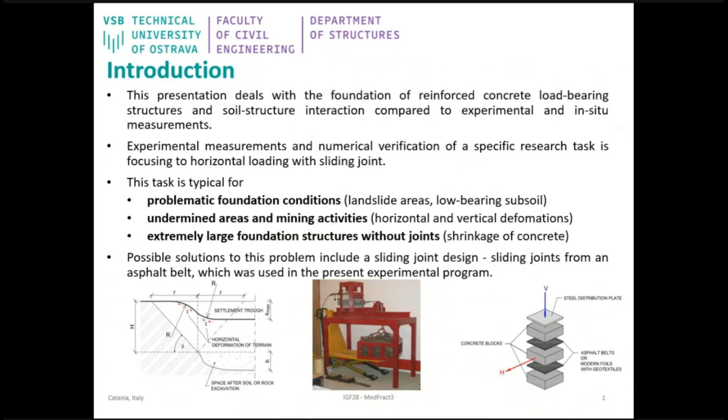We tried to verify this laboratory test on real structures. So in the interface, we have solved this soil structure interaction task. It is the method of calculating the settlements according to the Czech standard, which is the same as in Eurocode 2 or Eurocode 7. We have in Czech Republic these correction coefficients, which vary between 0.1 to 0.4. In Eurocode it is equal to 0.2. It is the same procedure.

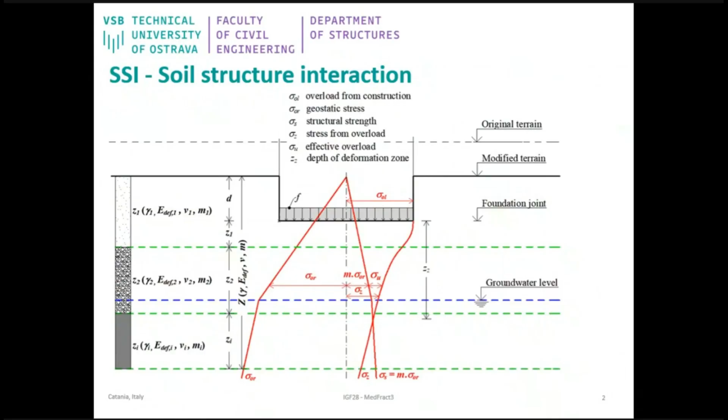Here is the experimental program with a small foundation plate. We verified 2 foundation concrete slabs. The dimensions are 2 by 2 meters, height of 0.15 meter, and the experiments differ in the load character, because it is the original subsoil from clay. We have this specialized facility, the so-called Stand. This is a big steel structure, and we pushed the plate into the subsoil by means of this jack, and we try to measure the deformation of the subsoil together with this plate by means of the vertical force, and we can also act on this edge by horizontal load.

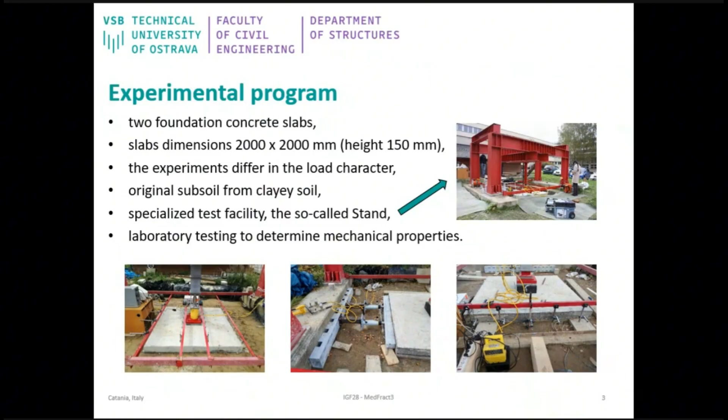So here you can see the details. The vertical load can be up to 1,000 kilonewton using a hydraulic press. The equipment can also act by horizontal loads and measure the horizontal deformations. Here you can see the details, but of course the horizontal load can be a little lower than the vertical, because it depends on the rigidity of this support by big pile foundation.

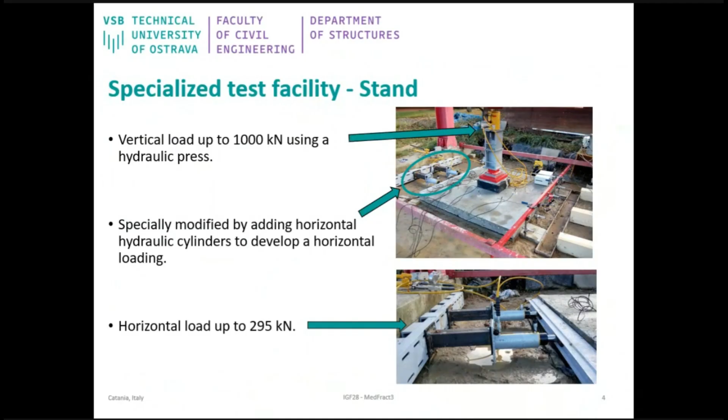Here are the results of the first experiment. We applied the vertical load by 75 kilonewton after 30 minutes, because it is very important to have time for relaxing these deformations. The vertical deformation was observed using 24 displacement sensors until the maximum bearing capacity was reached. And here you can see the number of these sensors. And on the right graph, you can see the duration of the test time and the load on the vertical axis. So the maximum reached is approximately 500 kilonewton.

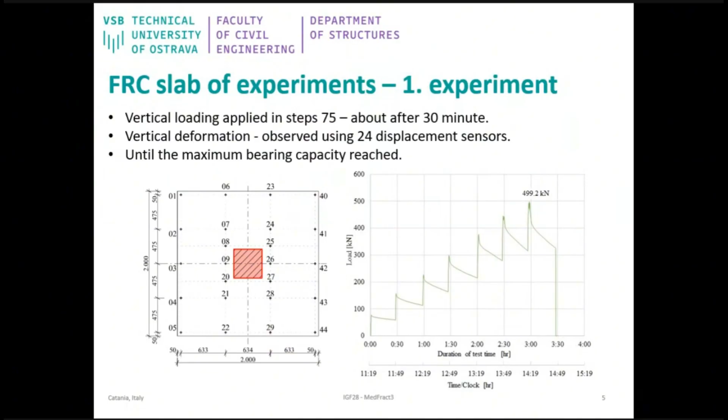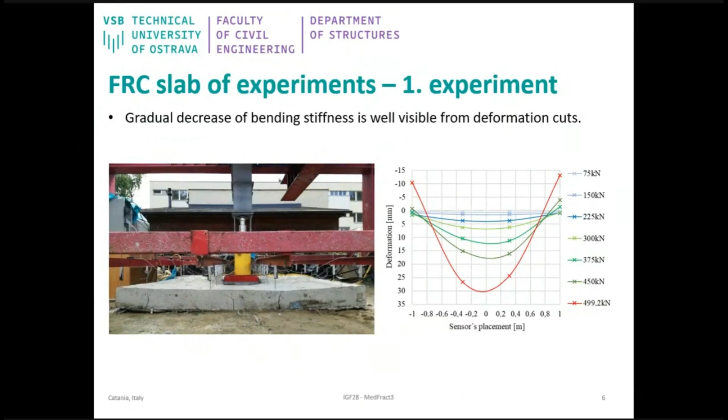Here are some results in the graph, and also this picture. On the picture, you can see the uplifting of the edges of this slab, and also arising cracks and decreasing rigidity of this plate. And here are the results with the deformation in dependence on these sensors in various loading steps.

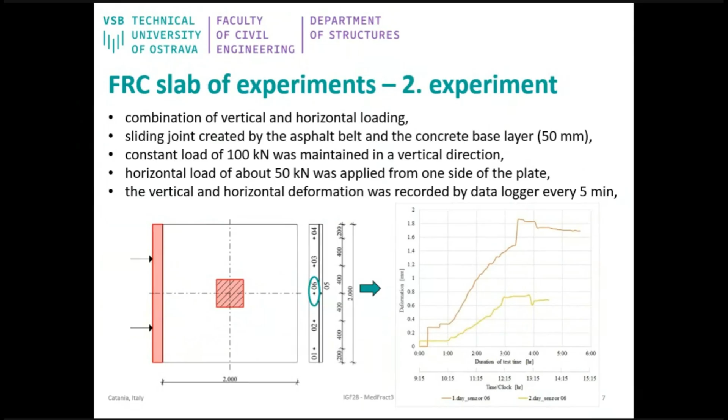The second experiment was performed by means of these two horizontal loads, and it was also the combination, of course, of the vertical and horizontal load, but the vertical load was only constant, 100 kilonewton, and the horizontal load was applied from one side of this plate. The result of the deformation depending on the time of this test you can see on the right graph. It is in sensor 6 in the middle of this plate. Of course, in the first deformation step during one day, the deformation was greater, and then it was a little lower.

And here are the other results. The ambient temperature varies, of course, from 5 to 22 degrees Celsius, as can be seen here. But in the middle and edge of the slab, the temperature was nearly constant, something between 10 and 11 degrees. It means that this temperature is not so much dependent on the ambient temperature.

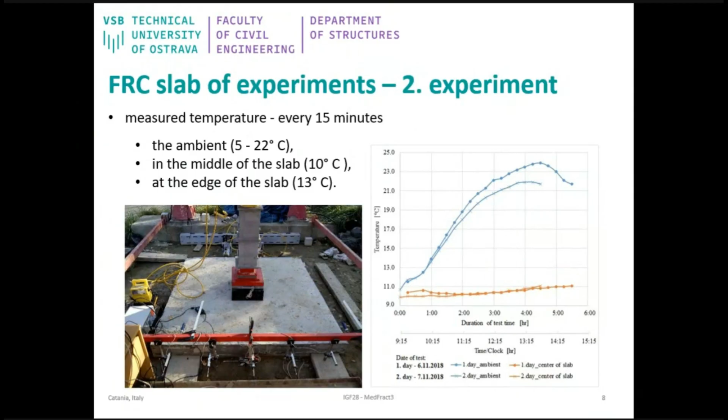Next we applied these results to a real structure. Here you can see the block of flats which was solved together as a space structure. It means the foundation slab together with the foundation box, with plate, walls, and also the upper structure, all concrete, a combination of walls, plates, and columns.

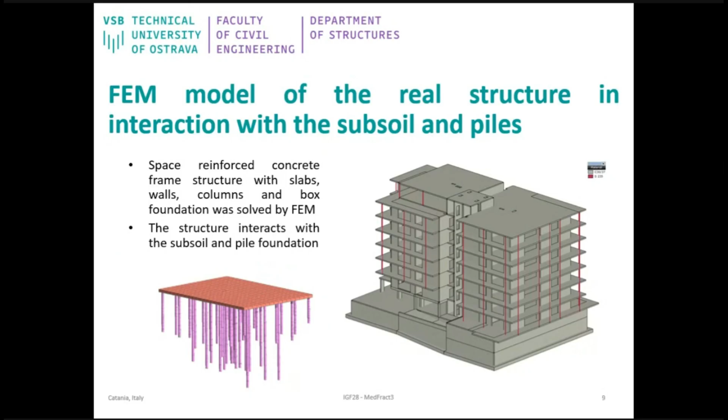The situation was a little worse because the foundation conditions were not very good, so we had to use this combination with piles, and the area was slightly sliding, so we also solved it by having longer piles under this shear surface, which increases the stability of the whole structure and foundation area.

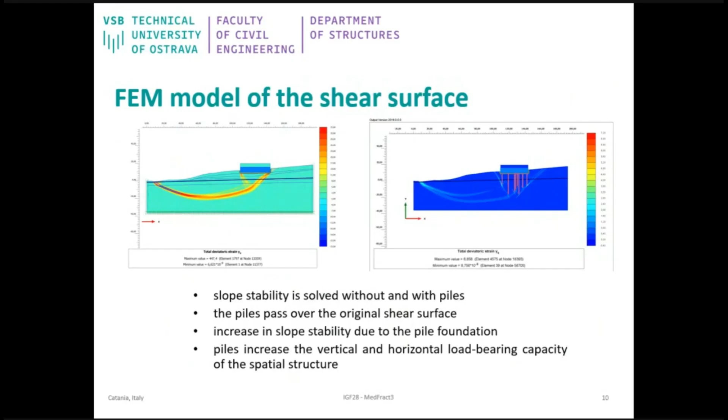The result was that the overall stability with this solution was on the same level as before loading this slope by the structure. Here are some results from the numerical solution. It was solved by the specialized program Plaxis, and here you can also see the cuts in various directions.

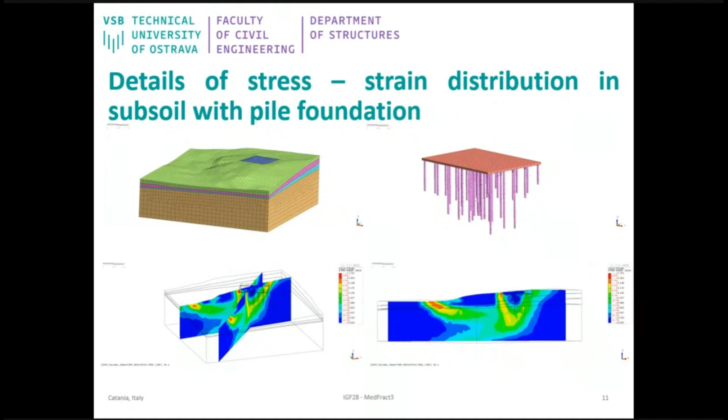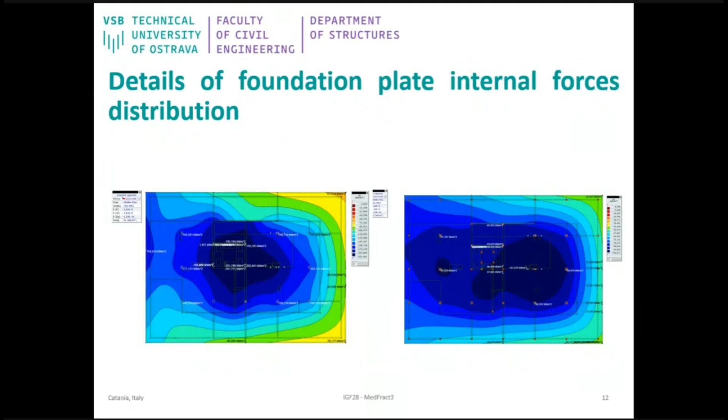What is important is to measure or calculate the distribution of contact stresses between the subsoil, or the load distribution, and the part which is loaded by these piles. It's not an easy task. We solved it by an iteration method, and here are some results for various stages. It's not so clear, but the contact stresses under the slab foundation are something between 100 and 2000 kilopascals.

And here's the real test in situ on the real structure. We measure strain in two piles at 3 vertical levels, on pile number 13 and number 21. I show you, it is here, this area, and here. Also the contact pressure between the foundation plate and subsoil at 2 x 3 points near piles 13 and 21. It means this block, this and this. So it's nearby for comparison.

We also measure the strain in the foundation in the X and Y directions in the center. The measurements were compared with vertical and horizontal geodetic measurements in the corners of this reinforced foundation plate, which is between 20 and 30 meters. And the data logger is in the middle, you can see these pink wires, and we sample all the data in one data logger.

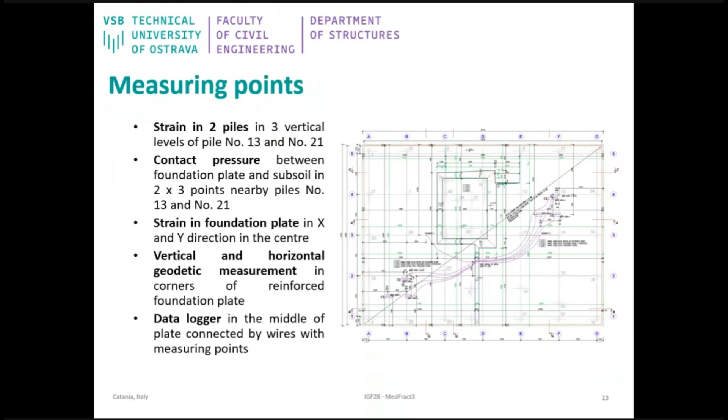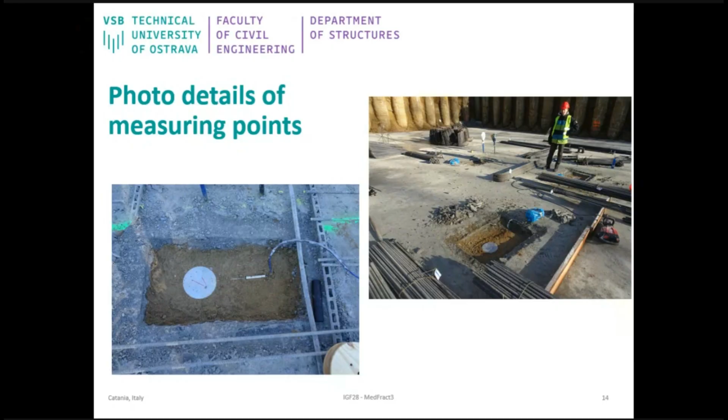And here are some details of the measuring points. It is the measuring plate for contact stresses, which is located near these piles. And here's the measuring point. It is situated in the middle of the plate because big forces arise there.

As you can see, we measure in 2 directions and at 3 levels, on the bottom, in the middle, and nearly on the top of this foundation plate, because these gauges can measure not only the strains but also the temperature, and the temperature varies, of course, due to the hydration heat and ambient temperatures.

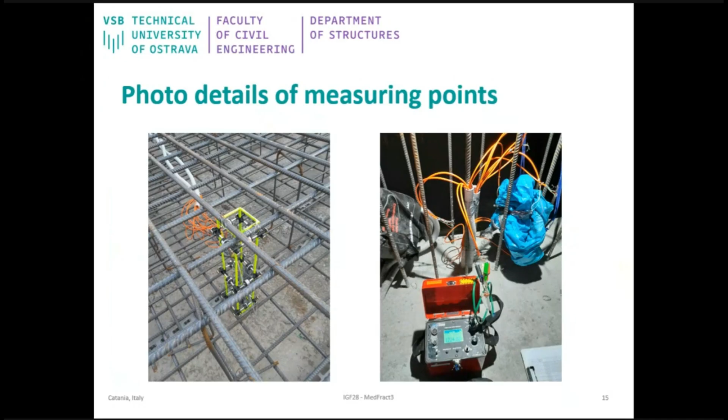And some details at the end. It is some details from drawings, but it is not so clear. I show only the details here. These are the details of the contact pressure cells, which are connected with these wires to the data logger.

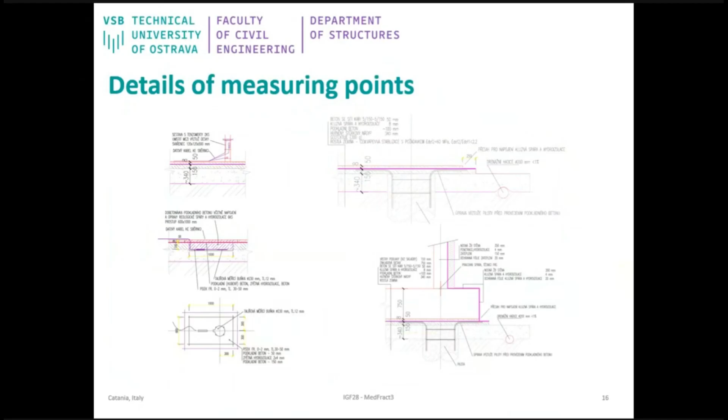What is also important, you can see the details of the pile and this foundation. As you can see, it is not a rigid connection, but here is this sliding joint, which can reduce the horizontal deformation, of course, and due to these horizontal forces, the walls have tensile stresses and tensile forces.

And some sentences in conclusion. We showed an example of the conceptual design and static solution of spatial reinforced concrete frames, wall structures, and box foundation. This interaction task was solved by the finite element method. The piles, of course, increase the vertical and horizontal load-bearing capacity.

We measured the strain in 2 piles and also nearby at 3 points the contact stresses in the subsoil. Also, we measure the strain in this foundation plate in 2 directions. All measurements are currently ongoing and are continuously evaluated during the construction of the supporting structure, because the structure is in progress now.

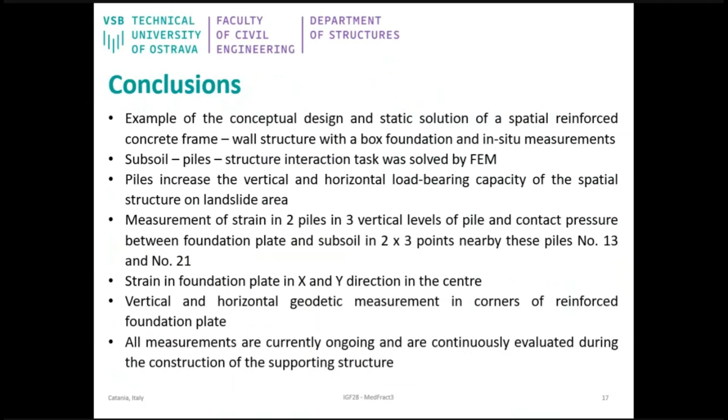But the first results show that there is good agreement between the design, the numerical solution, and these measurements. So thank you for your attention.